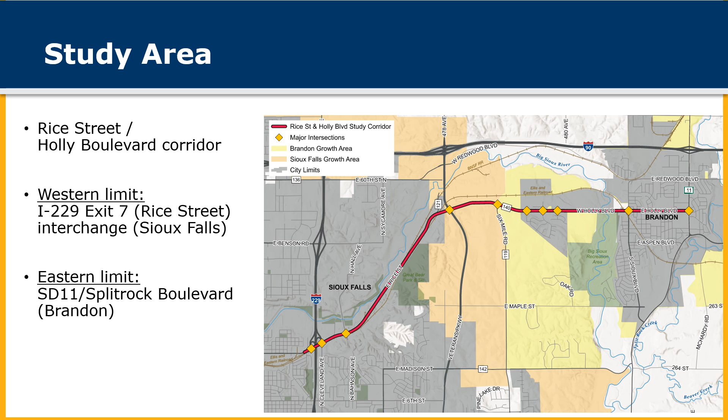Objectives for this corridor study include determining the number of lanes for the corridor, developing alternatives for all arterial intersections, developing a corridor access management plan and corridor land use plan, and ultimately developing a long-range corridor plan with recommendations and planning level timelines that encompass the diverse modes of travel throughout the corridor, including passenger cars, trucks, bicyclists, pedestrians, and rail.

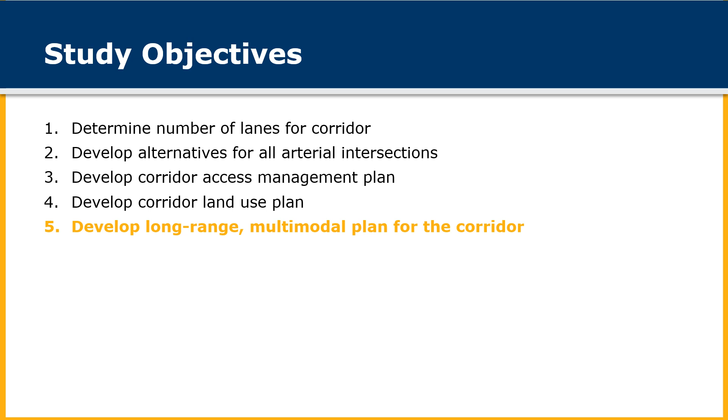We are currently in the third phase of the study, where we are presenting preliminary concepts for your feedback to help the study team further refine and then evaluate these concepts. We anticipate this phase to last into early 2024 before developing preliminary recommendations as part of the fourth phase.

At that point, we will host a third public meeting open house to share revised concepts and preliminary recommendations for your review and feedback before we finalize recommendations and draft the final report.

The remainder of this presentation focuses on an overview of the preliminary conceptual elements. With consideration of time, this presentation does not go into significant detail for each of the individual concepts. Therefore, we encourage you to look at the conceptual layouts and roll plots for the full array of concepts developed up to this point in the study.

The concept development process incorporated three key phases, with the first being to identify big picture, long-range vision type elements that establish corridor-wide guidance and priorities. The second phase was to identify corridor design elements that provide a framework for the various concepts, such as roadway typical sections and access management guidelines.

The third phase was to develop site-specific modifications reflected in the conceptual layouts for the major intersections, railroad crossings, the I-229 interchange, the various roadway extension opportunities, and the Holly Boulevard school access modifications.

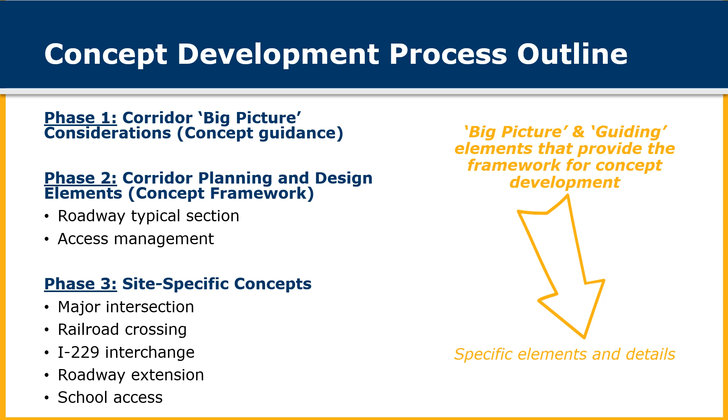The first big picture type considerations include future growth areas and roadway jurisdiction, as agencies often have different plan priorities and design guidelines. 6 Mile Road is the current growth boundary between the City of Sioux Falls and City of Brandon, with Sioux Falls to the west and Brandon to the east.

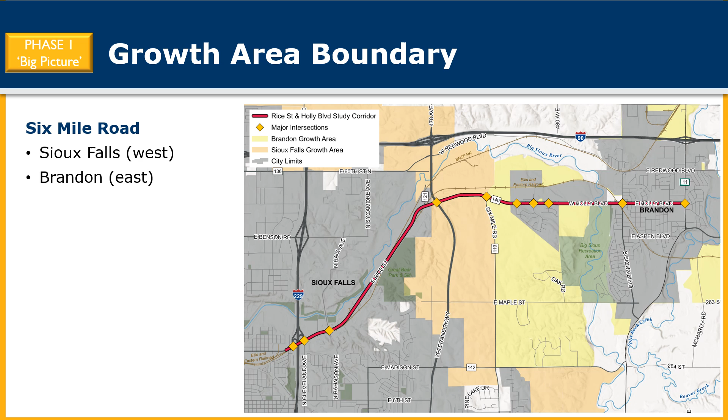Current roadway jurisdiction is fairly segmented within the corridor, as shown on this figure, and generally aligns with the current city limits. As Sioux Falls and Brandon continue to grow, we'd expect this jurisdiction to change with that growth. However, until then, we need to consider both the current jurisdiction and future jurisdiction in relation to Sioux Falls and Brandon growth areas when developing concepts and timelines.

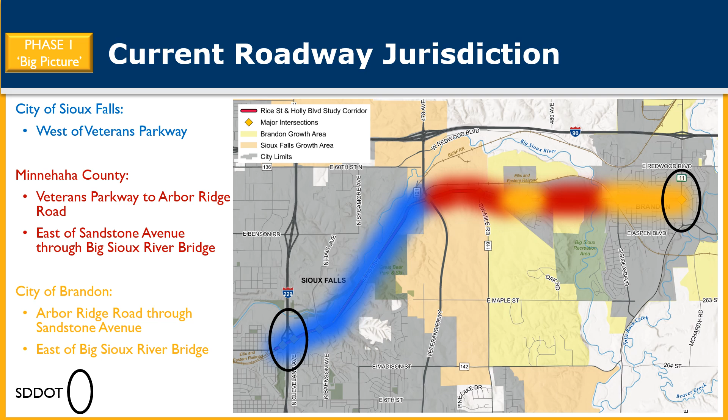Additional big picture type considerations include future land use and roadway classification. This study's land use planning process started with a meeting with City of Sioux Falls, City of Brandon, and Minnehaha County representatives to review and discuss future land use plans along the corridor and throughout the area.

In general, what is currently shown by the City of Sioux Falls and City of Brandon for future land use adjacent to the corridor in their comprehensive plans is still applicable and reflects a very diverse mix of uses throughout the study corridor. Currently, the study team is developing a corridor-specific land use plan map based on these discussions, and that will be presented at the third public meeting open house.

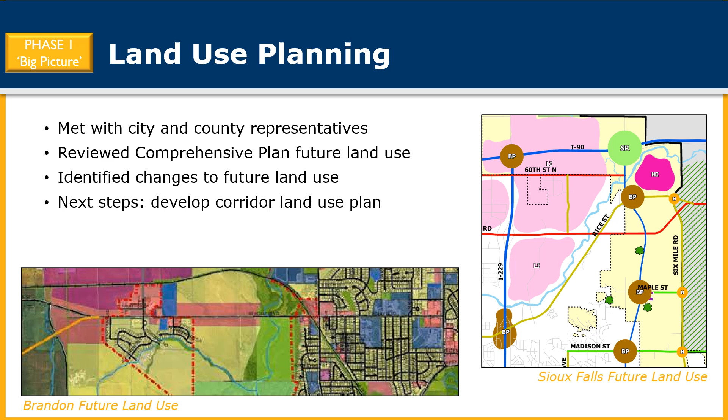In conjunction with future land use planning, roadway classification route prioritization establishes mobility and access priorities for roadways within the transportation network. The City of Sioux Falls, City of Brandon, and South Dakota Department of Transportation have all identified mobility as a higher priority for the Rice Street-Holly Boulevard corridor.

The City of Sioux Falls has designated Rice Street as a Type 1 arterial in their major street plan. The City of Brandon has designated Holly Boulevard as a major arterial in their Master Transportation Plan's major street plan. Both designations provide high levels of mobility through route continuity and limited access, and primarily serve commercial and commuter needs.

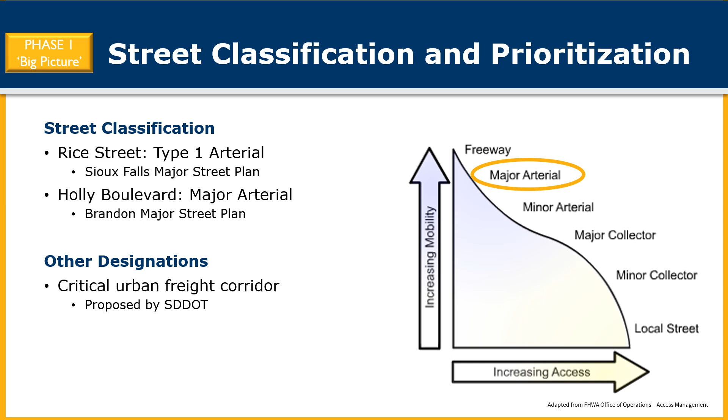The South Dakota Department of Transportation has also identified the Rice Street-Holly Boulevard corridor as a critical urban freight corridor due to its importance within the statewide freight network.

Traffic volumes play a key role in the long-range vision for a corridor and are directly tied to land use and route prioritization. Intersection, turning movement, and roadway segment counts were collected for the study in 2023.

Future year traffic volumes were forecasted for the study corridor using the Sioux Falls MPO travel demand model, which incorporates future development and roadway improvements identified in the MPO's long-range transportation plan.

Since the first open house, the future year volumes were refined based on more detailed information about potential development along the corridor. Updated daily volumes for the study's 2050 planning horizon, which reflects approximately 25 years of traffic growth and development, are shown on the public meeting open house display board.

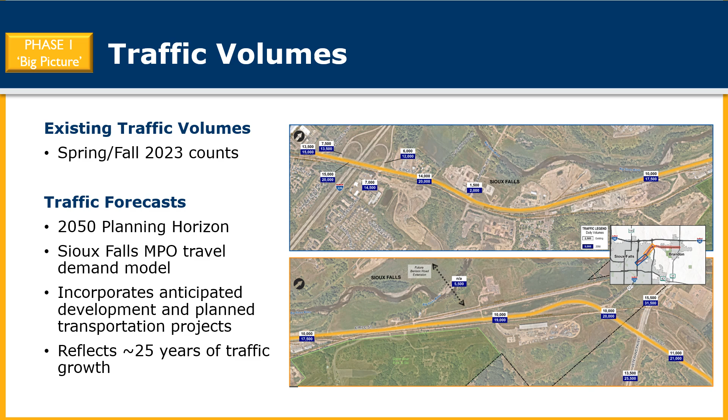Using the forecasted traffic volumes, the study team estimated approximate timelines and volume thresholds for when improvements may be needed, as well as what intersection configurations and traffic control were needed to accommodate the anticipated traffic growth. It should be noted that all conceptual layouts presented as part of this open house address capacity needs for the 2050 planning horizon traffic volumes.

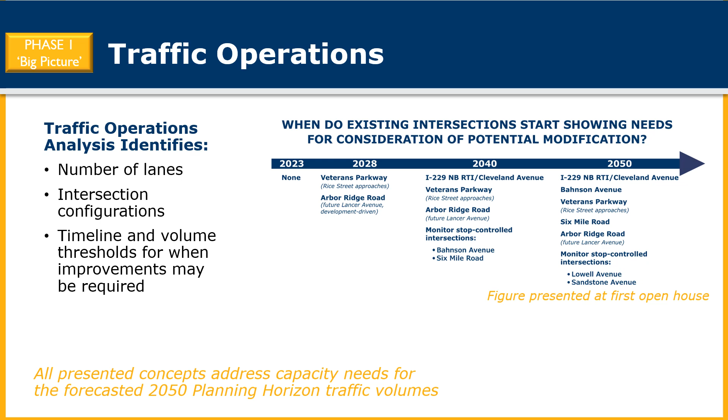Using the multitude of big picture type considerations from the first phase, the next step was to develop corridor design elements. In general, the future roadway typical sections for Rice Street and Holly Boulevard segments reflect multi-lane urban sections with 2 lanes in each direction and curb and gutter.

The Sioux Falls Rice Street typical section shown on this slide incorporates a raised center median and shared use path on the south side. A 4-lane divided option shown at the bottom provides for a shoulder and roadside ditch on the north side of the corridor for segments located in the floodplain.

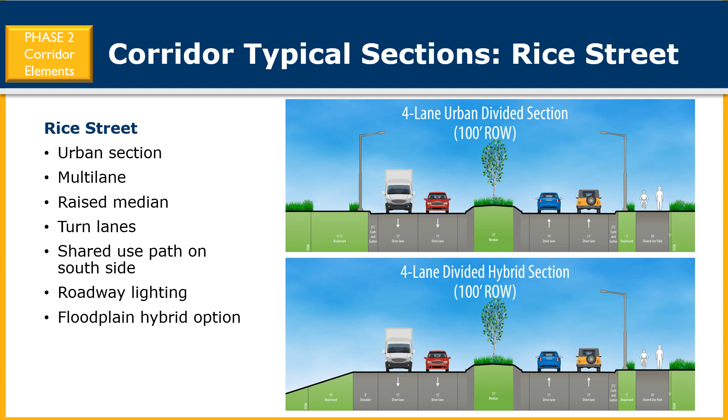The Brandon Holly Boulevard typical sections include many of the same elements to provide consistency and continuity through the corridor, but also incorporate a few differences. In addition to a 4-lane divided urban section, Holly Boulevard typical section options include 3-lane and 5-lane urban sections with a center 2-way left turn lane in lieu of a raised median.

For all Holly Boulevard typical sections, a shared use path is included on both sides to enhance bicycle and pedestrian connectivity to development on both sides of the corridor.

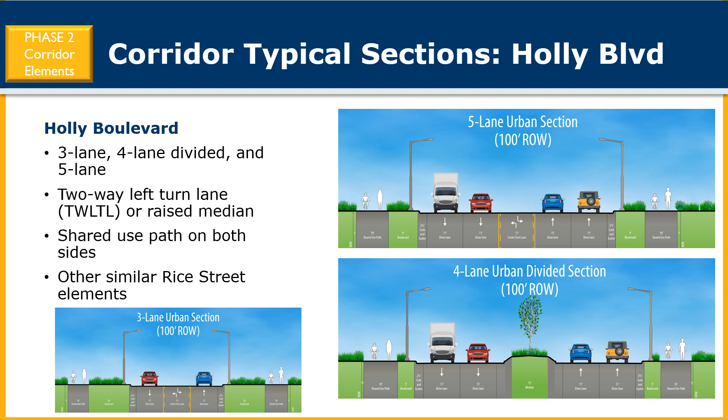The second corridor planning element focuses on access management and includes a review of access-related crash history, conflict points, and current City of Sioux Falls and City of Brandon access guidelines for the current roadway classification.

Access-related crash history was reviewed for years 2018 through 2022 and primarily centered on angle and rear-end type crashes. Access locations with a higher level of crash frequency include access points near the I-229 Rice Street Interchange and just west of the Splitrock Boulevard intersection.

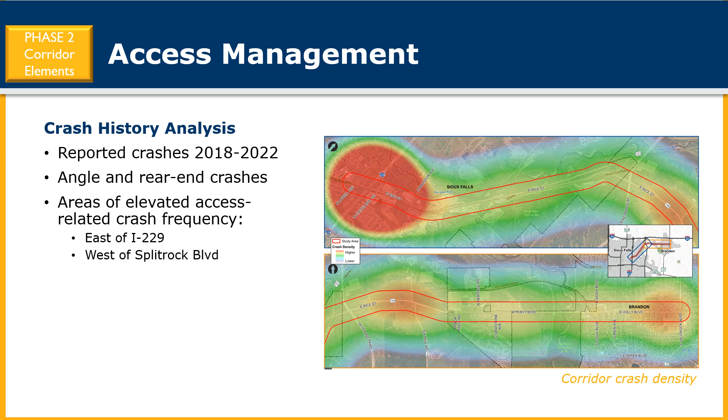An access conflict analysis was conducted throughout the corridor to review rear-end and angle conflict points within major intersection functional areas, head-on conflict points within 2-way left turn lanes, and right turn overlap conflicts where motorists are required to monitor multiple access points because they are spaced too close together.

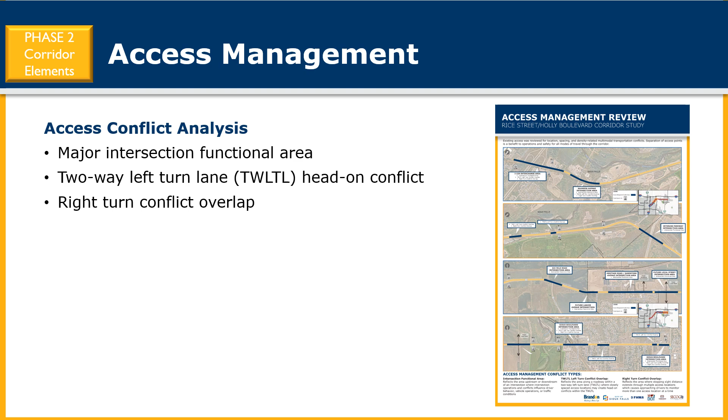The goal with this analysis is to simplify the driver's workload and provide for a separated sequential process of perception and reaction, deceleration and lane change, and completing a turn or stopping. There is a display board that identified these locations throughout the corridor, which are primarily located in the built-out areas.

Existing and potential future access locations were also reviewed with regard to existing access guidelines. As previously stated, corridor mobility is prioritized over access by both the City of Sioux Falls and City of Brandon. Current guidelines identify signal and other full access intersections be located at quarter-mile increments.

Partial access locations may be considered through a traffic study. It should be noted that failure to adhere to these guidelines risks operational and safety impacts to both the corridor and the transportation network as a whole.

These designations have been developed through multi-agency regional planning that consider the full hierarchy of the access and mobility relationship, and thus it is encouraged that the corridor adhere to these guidelines.

Access management elements were carried into the concepts in the form of access consolidation, relocation, and closure, and through restricting certain movements with raised medians. Future access locations were also identified based on current City of Sioux Falls and City of Brandon access guidelines. These items are all incorporated into the roll plot and display board concepts.

The example shown on this slide is of 3 potential long-range multi-lane Holly Boulevard corridor segments between Sioux Boulevard and Splitrock Boulevard. One objective with these 3 segment concepts was to assess feasibility and whether a multi-lane corridor plus shared use paths would fit within the existing right-of-way, which they generally do. A second objective was to explore various access management configurations for your review and feedback.

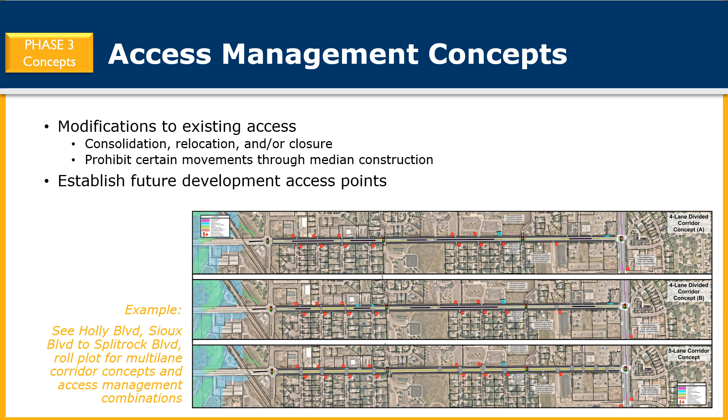Conceptual layouts were developed for all arterial intersections as well as other existing planned intersections throughout the study corridor. There were 3 primary intersection types considered with this study. The first is a standard intersection that may be stop controlled and then potentially signalized when warranted by traffic volumes. Standard intersection concepts were developed for intersections throughout the study area.

Single-lane and multi-lane roundabout concepts were developed for Brandon growth area intersections, and a continuous green T intersection concept was developed for the 6-mile road intersection.

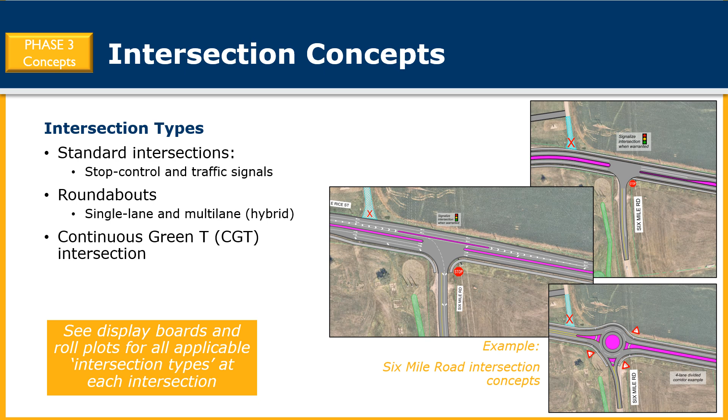There are a series of interim concepts and options intended to provide agencies flexibility to incorporate improvements if needed before expanding the corridor. Single-lane roundabouts on Holly Boulevard are shown on the display boards. Each of the multi-lane standard and continuous green T intersection alternatives are also applicable as short-term options where they could be constructed and open as stop controlled and then signalized when warranted.

It should be noted that intersections should not be signalized until warranted by traffic signal warrants in the Manual on Uniform Traffic Control Devices, or MUTCD. National research has shown that crashes tend to increase when traffic signals are installed when not warranted by intersection traffic volumes and other conditions, and thus it should not be assumed that a signal will be installed upon opening of intersections identified at potential future signalized locations.

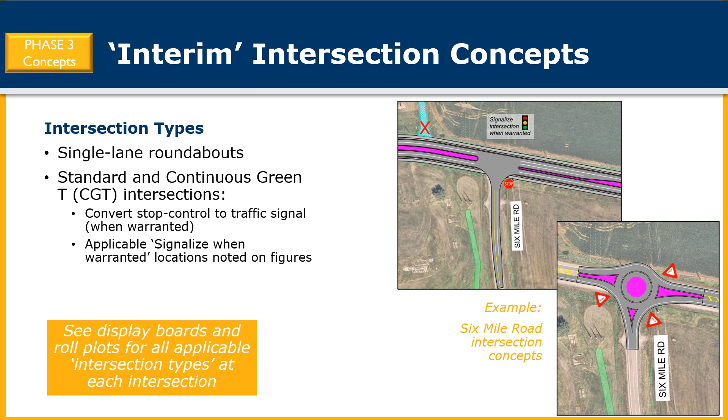A grade separation warrant analysis was conducted for the 3 Rice Street at-grade railroad crossings between I-229 and Veterans Parkway. This analysis used methodology presented in the Sioux Falls Engineering Design Standards to help determine whether grade separated crossings should be considered based on a variety of engineering and community planning related considerations.

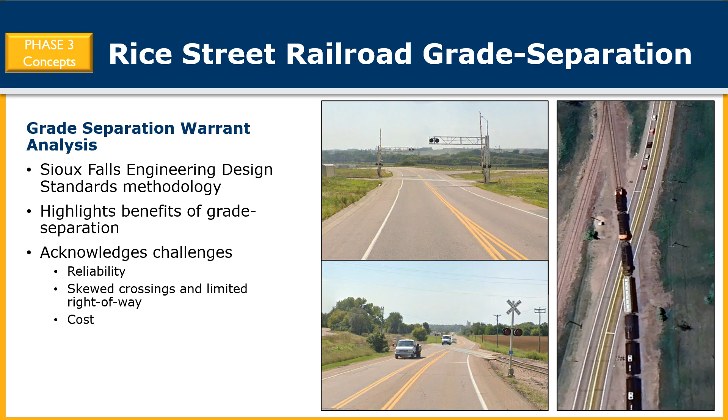The analysis concluded that grade separation would be beneficial at all 3 locations, but also acknowledges challenges due to the skewed crossings, limited right-of-way, cost, and potential diminishing benefits on route reliability if only 1 or 2 crossings are grade separated. A feasibility analysis for constructing Rice Street over the railroad tracks at all 3 existing at-grade crossing locations west of Veterans Parkway is currently underway.

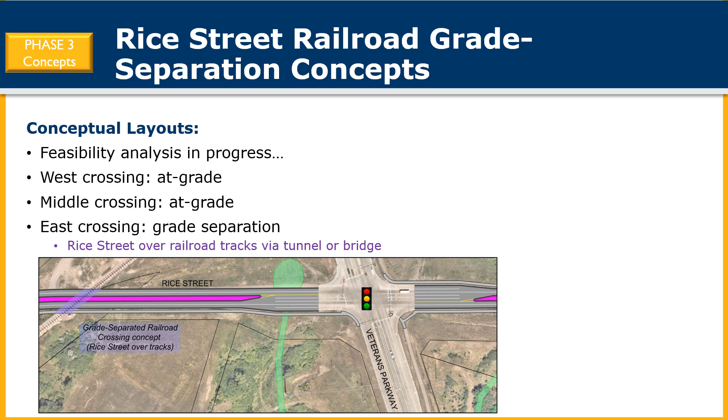Therefore, the preliminary concepts show the existing at-grade crossings at the west and middle crossing locations. The eastern crossing, just west of Veterans Parkway, does show a tunnel or bridge based on available space and advantageous terrain for grade-separated crossing.

At the I-229 Exit 7 Rice Street interchange, 2 concepts were carried forward from the I-229 Major Investment Study and updated as part of this corridor study. The concepts include a 6-lane section through the interchange and a rearage connection at Glenwood Circle. The primary difference between the 2 concepts is whether the southbound ramps tie in at their existing location or at the Lowell Avenue intersection.

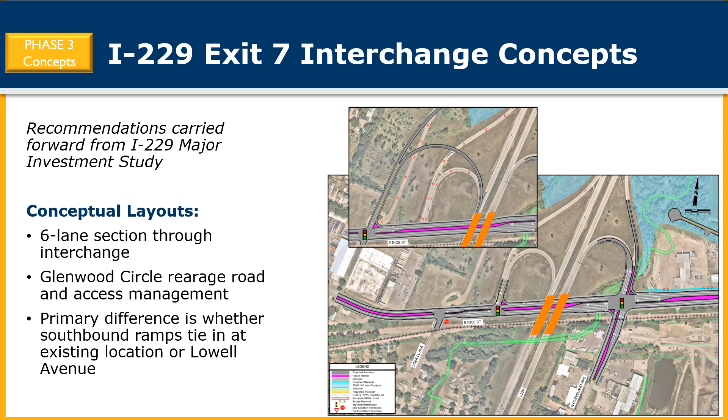There are several roadway extension concepts that enhance connectivity throughout the area, 2 of which include different Benson Road extension options that span the Big Sioux River and railroad tracks. One concept includes a northern alignment that lines up with the Veterans Parkway intersection and will allow for potentially designating Benson Road as a prioritized east-west route between I-229 and Veterans Parkway instead of Rice Street. The second concept is a southern alignment that tees into Rice Street via an elevated intersection just east of Great Bear's existing access.

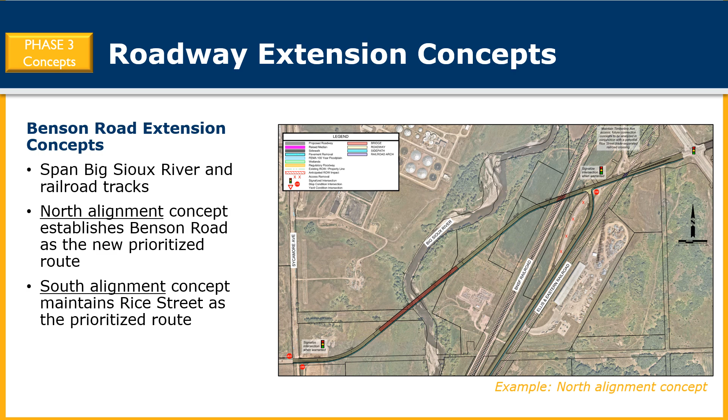Other roadway extension concepts include Bahnson Avenue and Sycamore Avenue extensions south of Rice Street. The Bahnson Avenue extension alignment is already designated and would tie into existing Bahnson Avenue roadway segments. The Sycamore Avenue alignment would be new and extend from a new Rice Street intersection around Richard Road to the existing Sycamore Avenue to the south. There is also a concept for a potential Rice Street realignment around the western at-grade rail crossing.

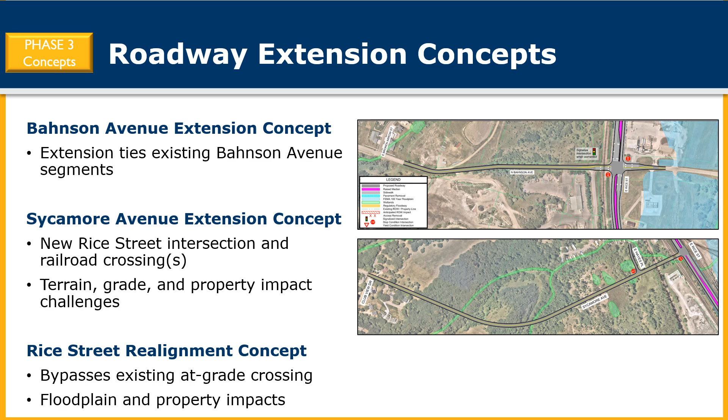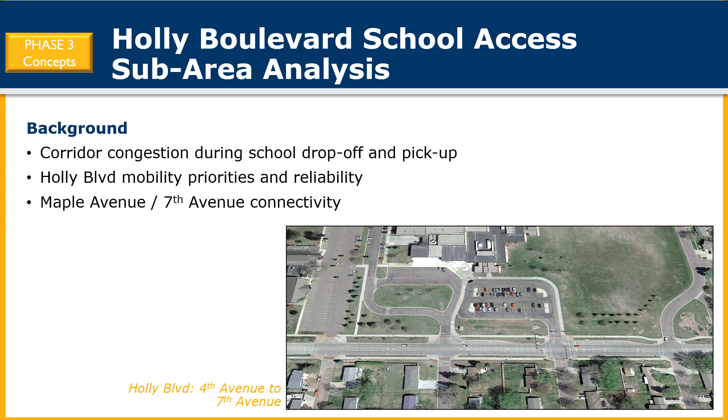The final series of concepts to touch on as part of this presentation include potential modifications to Holly Boulevard at the 6th Avenue and 7th Avenue intersections. Currently, Holly Boulevard can become congested during school drop-off and pickup times, particularly when there are large events at the high school during the afternoons. Traffic stopped in the through lanes, blocking progression through the area is not ideal for a high priority arterial roadway. So part of this corridor study is taking a closer look at this area to develop concepts that enhance mobility and reliability of travel through and across the Holly Boulevard corridor.

A series of concepts were developed that close the school parking lot access at 6th Avenue and routes the middle school's parking lot access east to Maple Avenue. This increases internal storage to minimize risk of traffic backing up on the arterial roadway and allows for the Maple Avenue 7th Avenue intersection to be signalized. Signalizing the Maple Avenue 7th Avenue intersection would have benefits beyond just the school peak times, as it would provide a signalized crossing for a connected north-south roadway.

The existing 6th Avenue traffic signal would then be removed. Concepts include a variety of alignments and intersection types beyond a standard intersection, including a mini roundabout on Maple Avenue north of Holly Boulevard and roundabouts on Holly Boulevard at the Maple Avenue 7th Avenue intersection and the high school access intersection.

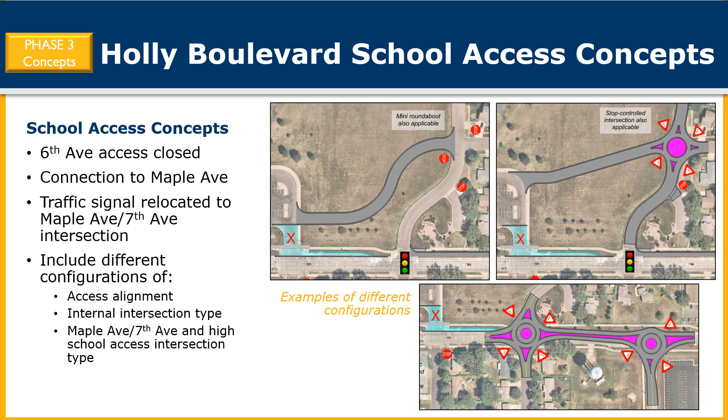Before concluding the presentation, we'd like to circle back to the final objective of this meeting, where we are looking for your input on the preliminary concepts. We encourage you to review the roll plots and display boards and let us know what you like or don't like, what you would like to see modified or considered, as well as anything else we need to address. There are several opportunities to provide comments, including submitting a comment card available at the public meeting open house, reaching out directly to any of the study contacts, or submitting a comment through the study website.